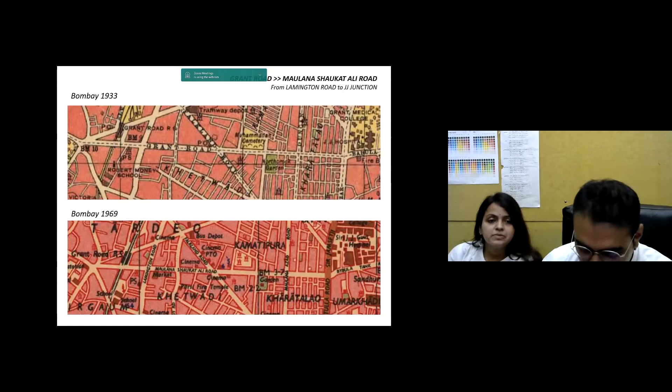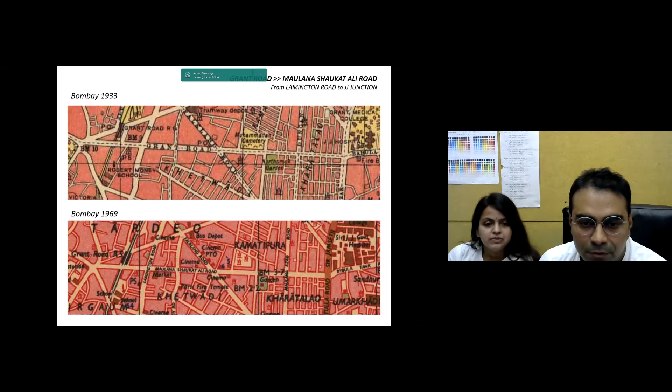This project is located on one of the old arterial roads called Grant Road. It was formed during the 1900s, during the plague epidemic, as part of city planning, when large thoroughfares were created to form the east-west artery of the city. It cuts across very important old precincts of Bombay, including the bazaars and railway stations. It also has an old entertainment district, the Kamatipura area and Falkland Road, the red light district.

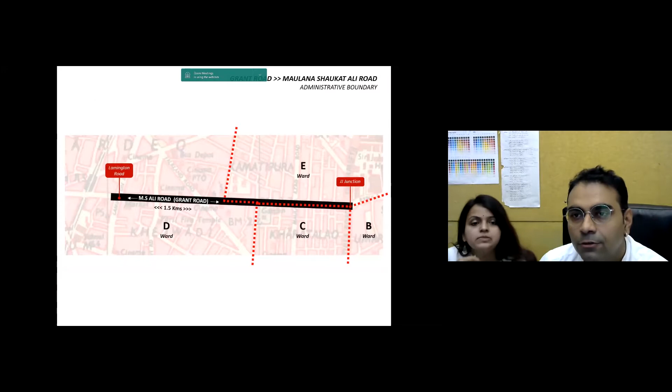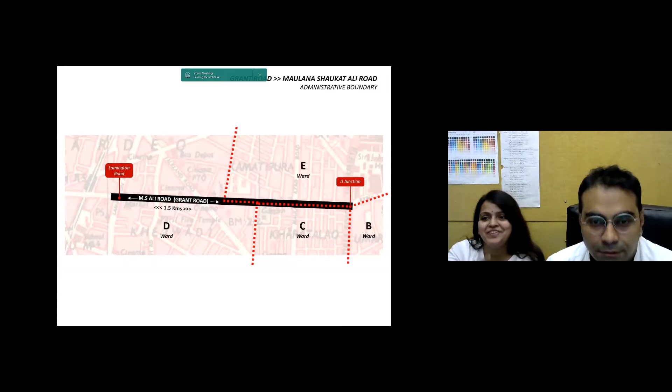The stretch we are looking at starts from Lamington Road Junction near Grant Road Station towards Mohammad Ali Road, JJ Junction. It stretches 1.5 kilometers, and its administrative boundary is shared between four wards. So when dealing with administration, you're dealing with four wards and people from four wards. The road itself has a division where half comes under E ward and half under C ward.

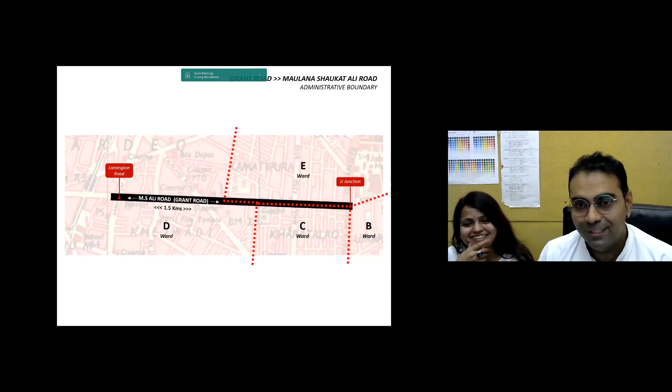When we started working on this project, we realized there are too many stakeholders of the street. On one hand you have departments like road cutting lines, RL remarks, city survey department—even to move a light pole, there's an electric work department, garden department, etc. And then there are stakeholders of the street itself: residents, vendors, hawkers, street animals, pets, etc.

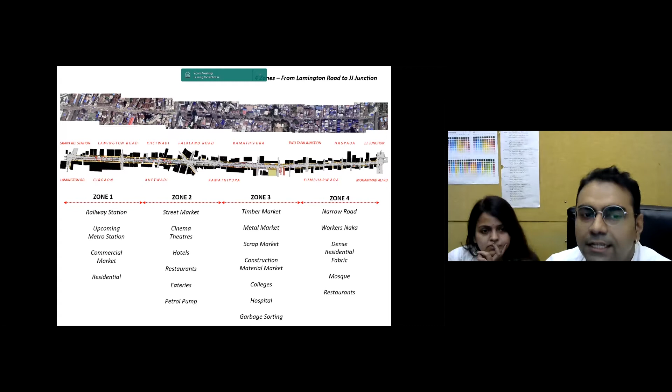So primarily, we looked into the zones. There are four major zones of the street. Zone one, near the station, is the market and railway station, which also has an upcoming metro station. Zone two looks into cinema theaters, hotels, restaurants. Zone three is the bazaar, with the timber market, metal market, scrap market, and old Chor Bazaar around it. The fourth zone is majorly a workers' naka, where every early morning workers set up at the corner and contractors come to take them for work.

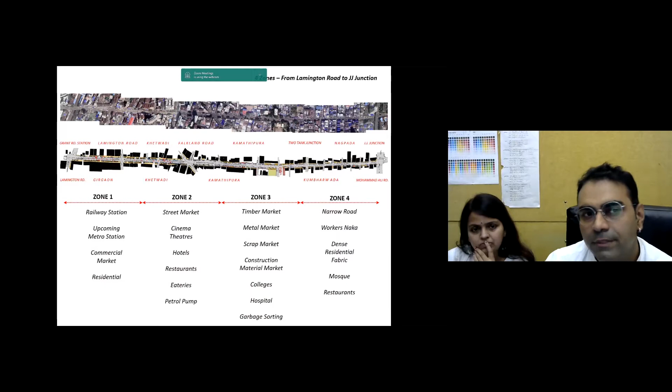The road has a right of way of 36 meters wide, and it shrinks down to almost 16 meters on the other end—so it becomes 50% at that stretch.

What we realized is that it's important to record the complexity of the site. So the first step was a rigorous recording of the street, to understand the patterns of the street. We started drawing them because the survey drawing really ignores a lot of aspects of the street.

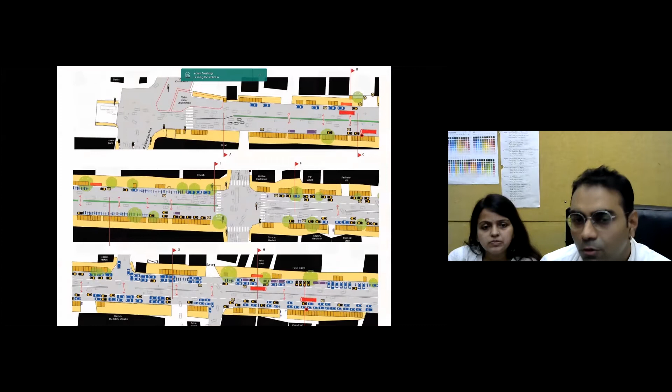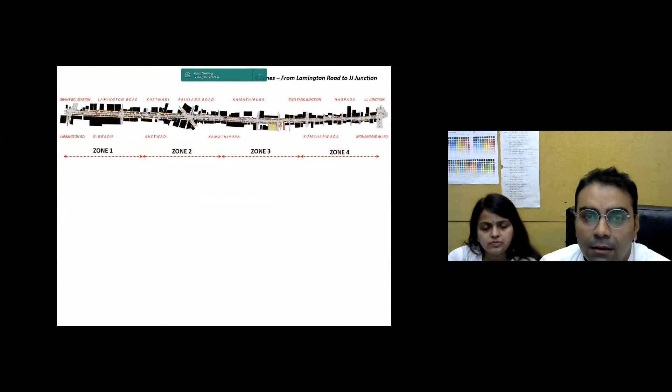Second, we started conceptually looking at how to strategize it. We had four large ideas for a residential fabric, for the market fabric, etc. But then we realized that this is a kind of street which will need a customized solution. It can't be seen as these generic typical ideas which can be stretched across the edge.

So we actually drew the entire project—we'll come on to that in the ending slides—going with the individual ideas we addressed, and eventually we had to draw the entire road. You can't draw a typical section and multiply it anywhere; you have to actually go about drawing each and every corner of the road.

So the first thing was looking at the idea of threshold, because the way Indian streets or any of the roads are designed, they always take you from point A to B, but the entire transition on the interface in between is what actually gives character to Indian streets. So how do we really work with that?

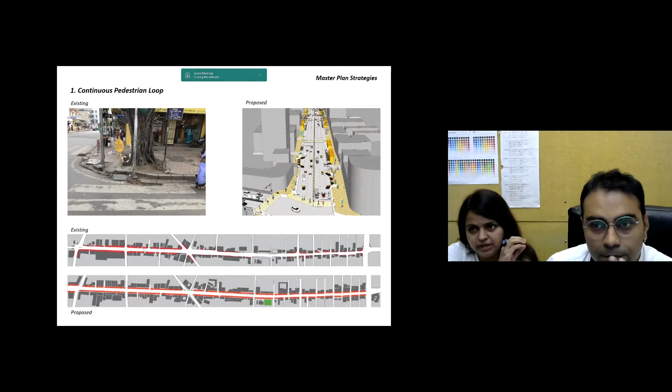Actually, continuously, there's not even space to walk. So if you start from one point of the road, you won't even reach the last point. So first is giving space where people can walk continuously on the street.

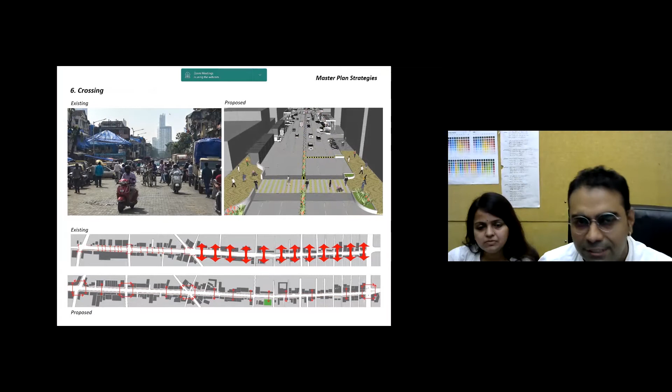Second was to work around crossings, because in India people wave their hand and everybody crosses—it's never a method. There were almost 52 points where people were crossing all across. So we strategized how people cross, and how handicapped people get access through these roads.

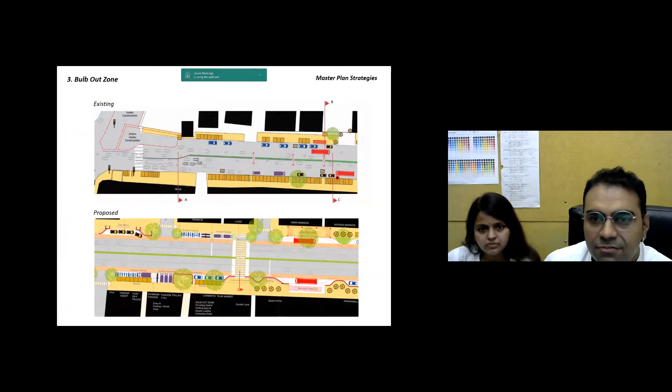We also looked into the idea of creating a bulb-out zone, like an edge which was the threshold of the buildings and the streets, which accommodated goods vehicle parking, scooters, hawkers' area, and a lot of other facilities that existed on the road. Another interesting specific edge was this large stretch which was like a sponge—the real threshold of the city, which is no one's and everyone's at the same time.

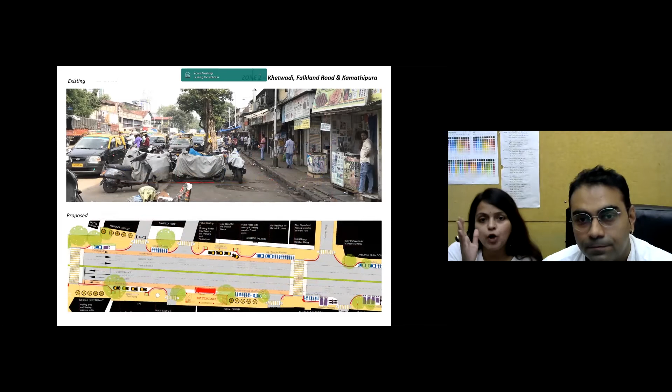All kinds of activities take place there. Currently this threshold never gets designed, and that's where a lot of activities find their place—not only parking, but hawkers, people sitting, people sleeping. Goods loading and unloading of the markets, people waiting for the bus—all that activity happens within the threshold.

So I think our main focus was to design that. That was one of the stretches which we really took as a design component, which did not disturb the road nor the pavement, but just allowed these everyday practices to find their space within them.

Then we looked into the idea of sculpting the domains, because there were lots of stakeholders and a lot of domains. Most of the shops had their pets and they were bathing them.

So there was a junction where we created an animals' plaza where local pets could be bathed and fed, with drinking water facilities. There were hawkers along the entire stretch, and there were organized vendors along the stretch as well.

So we designed the street vending zone as a kind of prefab structure which could organize activities on the pavement. We actually went and counted all the shops, recorded their sizes and the professions they were doing, and accommodated them where they were located, but amalgamating them in one place.

So they have a good opportunity for business—there are more than 300 vendors on the street across the stretch.

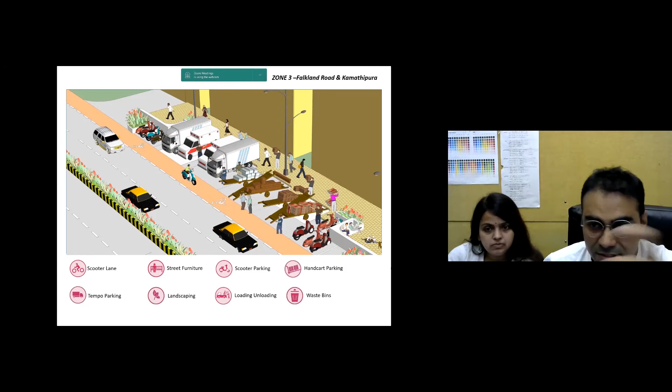There were loading and unloading zones created for the haath gadis and the local bazaars, and for the tempos, etc. There were kabutar khanas and a lot of these kinds of activities. This is the space which was the workers' stall, and there's a newspaper reading stand on the left.

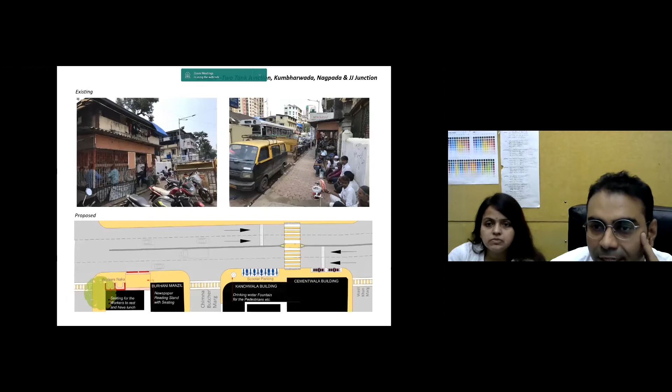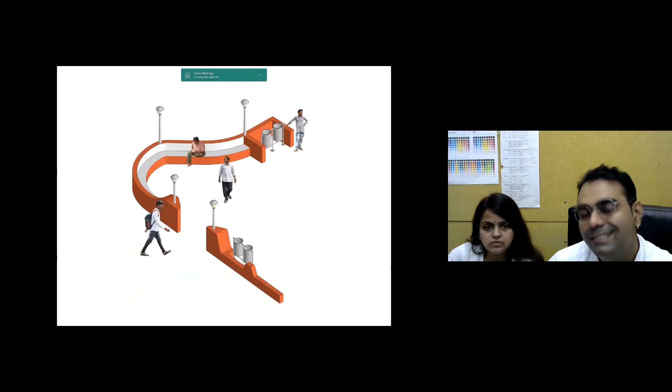Eventually, along the entire stretch, we worked out somewhere around 450 to 500 pockets where all this street furniture, activities, facilities, and utilities can be incorporated, including dustbins, street lamps, loading areas, and crossing points.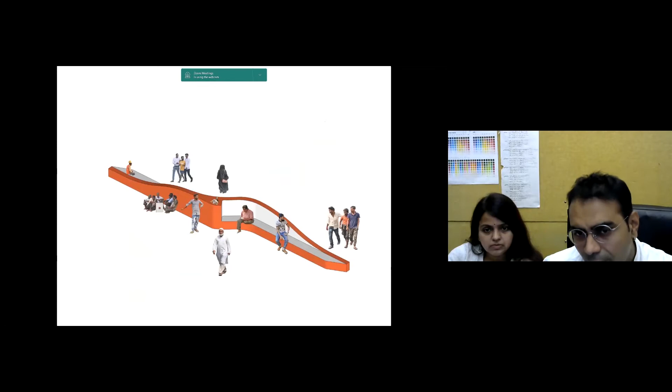This is one of our main ideas through which we have added the interface of the design, the interface of the threshold through these objects. Due to time constraints, we're not able to put all of them, but there are somewhere around 400 to 500 of these.

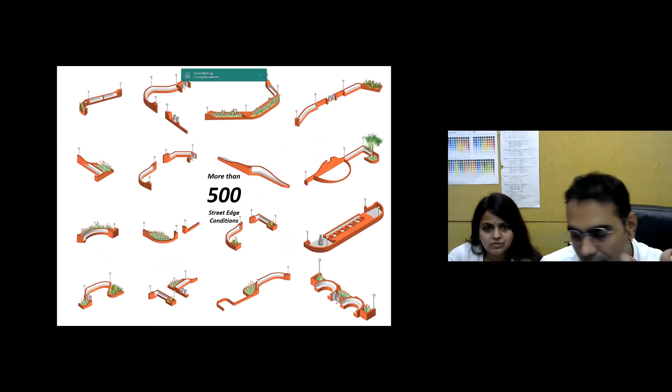When designing the street, it's also about scripting the urban form, because roads are generally seen as just the paved area for vehicles, but what kind of city are we trying to shape?

There were a lot of junctions where we defined and realigned how crossings happen, where people can pause, find a place to rest, and have lunch in the afternoon.

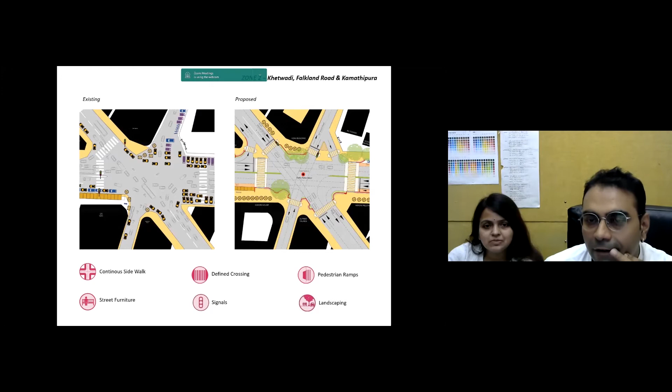There were a lot of structures that are usually separate, like toilets, bus stops, and light lamps, which currently obstruct the way when you're walking. So we proposed the idea of hybrid amenities, amalgamating them together so they don't come as an obstruction on your path.

Many of these places also don't get used because of the way they are placed.

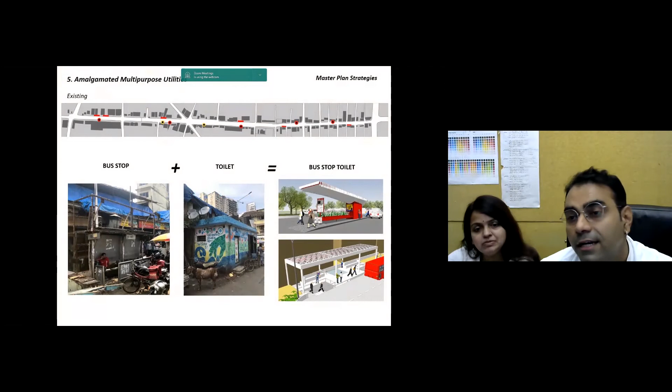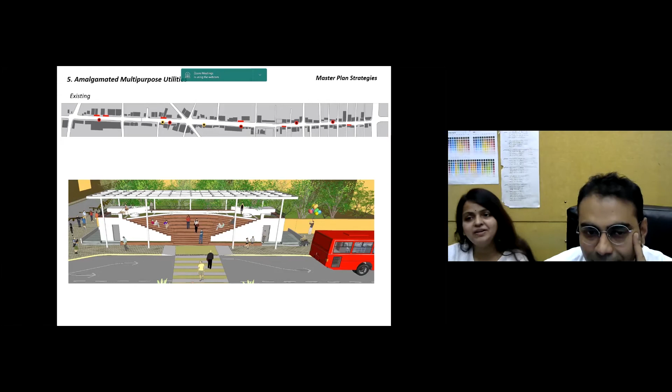So we created a bus stop toilet, a pavement toilet, and a space for the workers' naka where they could halt and find space. It's a negotiation with a toilet underneath, a bus stop, and a space for workers to rest — all three amalgamated in one.

There were bus stops with toilet facilities, designed for very small sites. Some were underground toilets combined with bus stops — the right of way for pedestrians continues, while the toilets are placed underground, which also works as a bus stop at an upper level.

Then we looked into the idea of how we are shaping the city. An exercise was conducted to draw each of the buildings along the stretch. There are more than 400 buildings along it, for which we created a long scroll, 30 feet long.

Many of these buildings are getting redeveloped and erased, but they were actually the buildings that gave identity and language to this Maulana Shaukat Ali Road. This is also a junction where the metro station and railway station will come in the future.

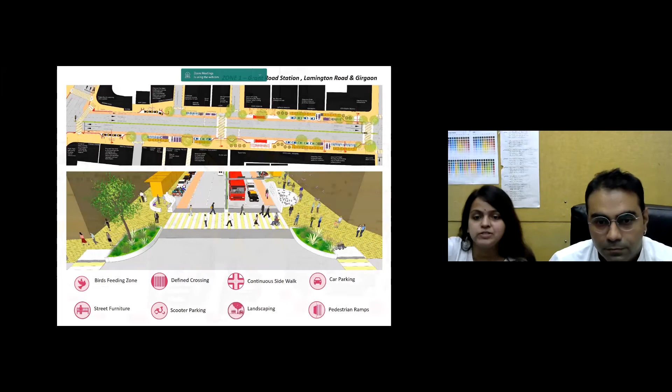There will be a large volume of people coming out of the commuting station, so the idea was to widen these crossing points and junctions where people are constantly crossing, so they can accommodate a high volume of people.

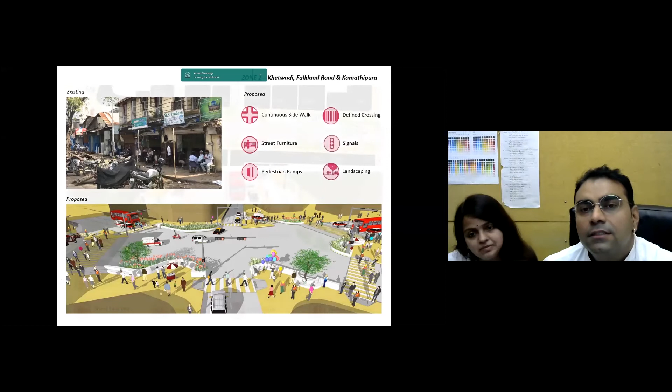These were some of the crossings and traffic junctions, and this is just a glimpse of that long 30-foot scroll, where notes were made around each building depending on what activities take place and what gets used.

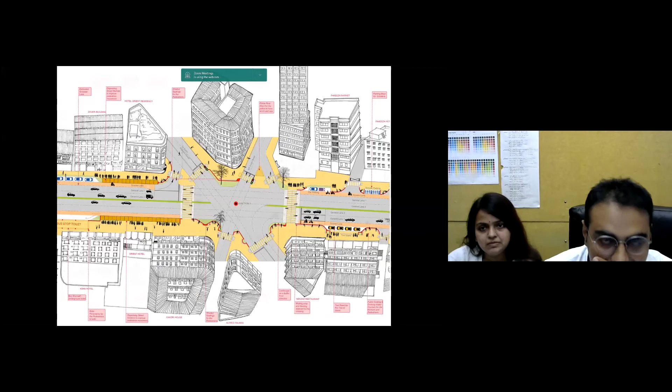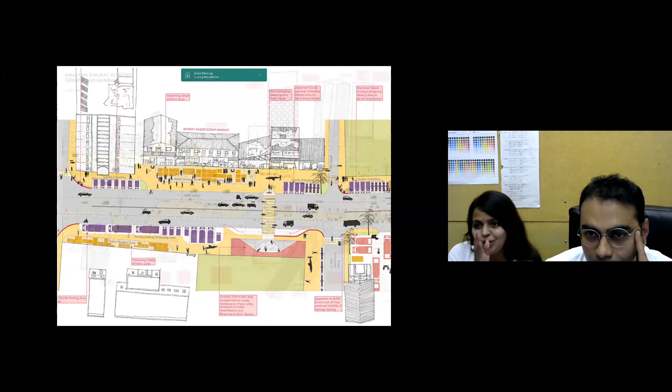These small notes helped carefully script and draw the entire stretch. We had to figure out a new method to record and draw the entire road, because cross sections or typical master plans weren't doing justice to the complexity of the site.

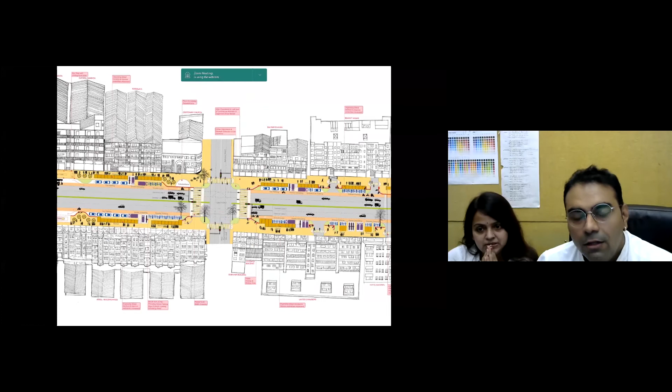This is actually a drawing we developed over a long time to record all the activities. It was also nice that when we presented it to the municipal corporation, they were able to associate with the buildings and start looking at the city differently.

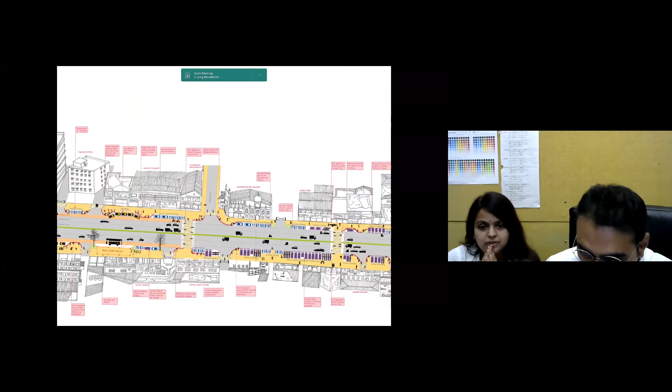Otherwise, many of these projects are just given through tenders to contractors, who pave the roads and the project ends. But people on the site also understood their road much better through the drawing — they were able to connect with it.

They could say, okay, near the mosque this is happening, near this junction this is happening. So it's a good way to even explain to people what is going to happen on the road.

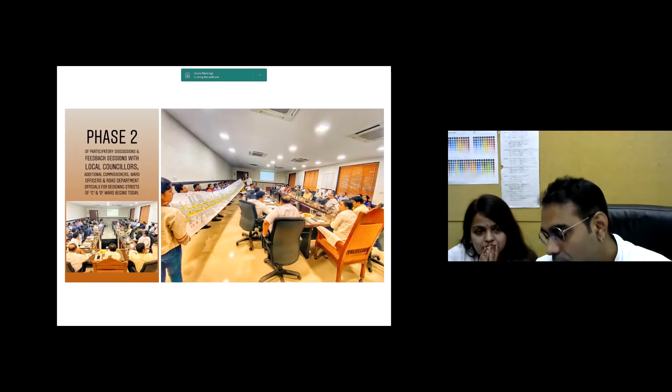Then there were different stages where it was presented to the commissioners of different wards, the local MLAs, the local political representatives, the councillors, and also all the departments - roads department, hydraulic department, traffic department, sewerage department. There was a meeting held with all the departments to synchronize what is to happen.

What you see on the left is that scroll which was always discussed with them, and then they shared their notes and ideas behind this, and the process was further defined. That's the traffic commissioner on the left, the municipal commissioner.

We also did an experiment. The scroll of the street was kept actually in the public plaza at VT station, and a lot of people started sharing their views and ideas around these things.

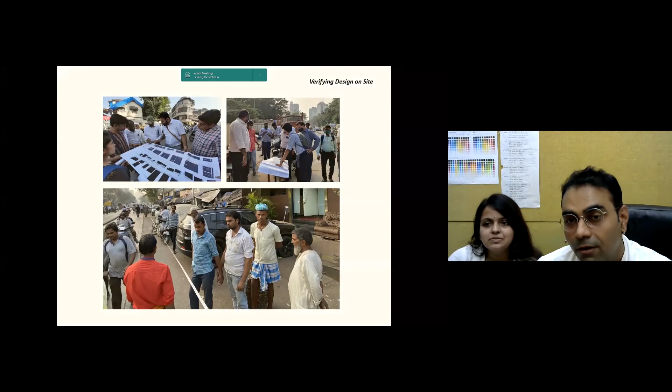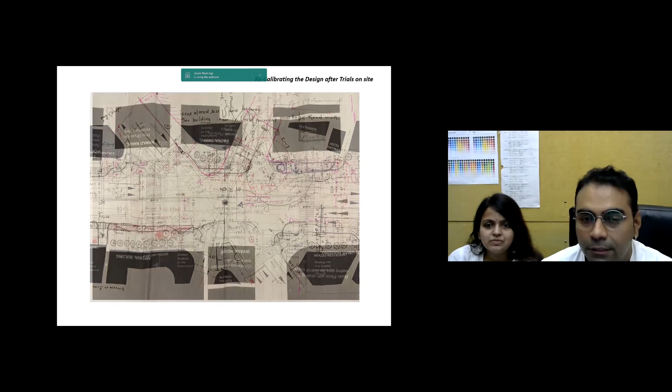This was at the municipal commissioner's office at Mumbai, and eventually it went for mock testing on the field, where what was designed on the screen was then tested on site, marked onto it, and recalibrated. There were lots of things which people suggested and the shopkeepers wanted, so this went to a third, fourth round of negotiation and editing, looking at the reality.

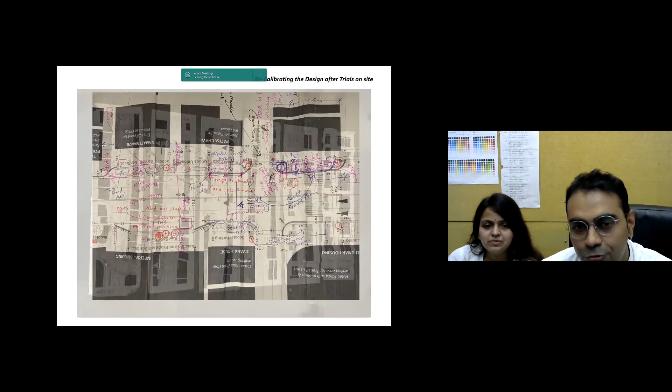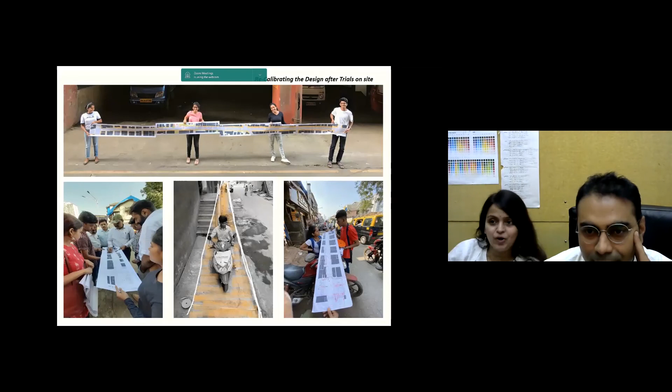These are some of the field notes which we collected over a one week period. Our entire studio was on field during that time. There were also scooter lanes suggested, so we marked those on. There are a lot of two-wheelers on site currently, and they are constantly colliding with the four-wheelers. The idea was to give them their own lane where they're able to safely travel through the road.

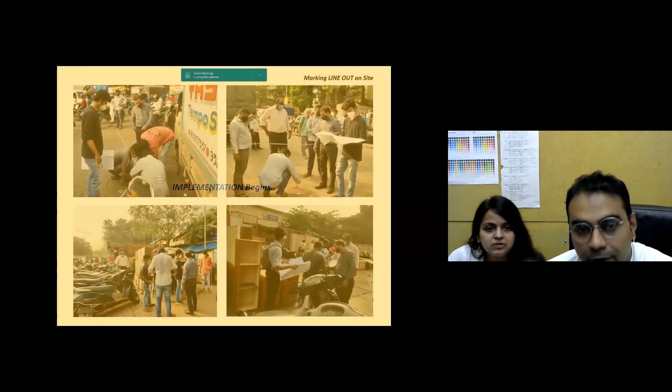Right now they started with the implementation process, so we were having a line out. These are some of the technical drawings which we have started with, and it's ongoing.

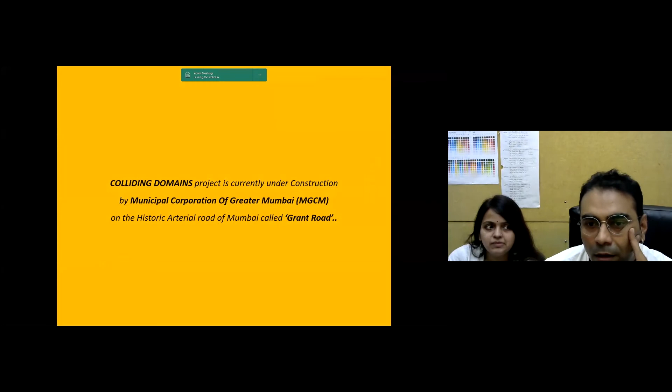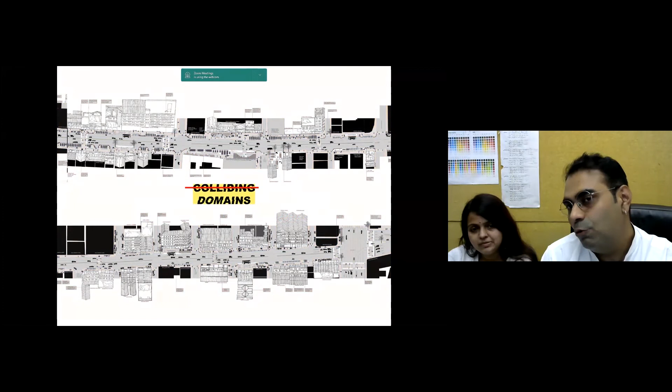Right now we are engaged with four wards of the city for a stretch of 1.5 kilometers, and it has been taken as a pilot project by the MCGM. Eventually the idea was that these domains of the city which are colliding, you figure out a strategy where we can make peace with all these stakeholders and create a more lively environment - look at it more as a celebration of the everyday. Yeah, that's it.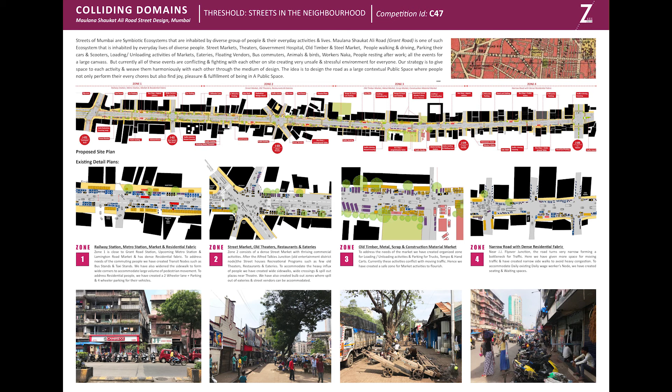I'd like to talk about the jury award winning project by Kalpit Ashar and Mayuri Sisodia. I think this was a very intrepid attempt to reclaim the sidewalks along Shaukat Ali Road as a crucial public and community space, especially for the dense and congested neighborhoods that flank its entire length. This remains a highly contested site, and these pavements have shrunk over time with informal occupations and encroachments of street commerce, private interests, and poorly managed commons, all vying for space along this primary artery that runs north-south through the city of Bombay.

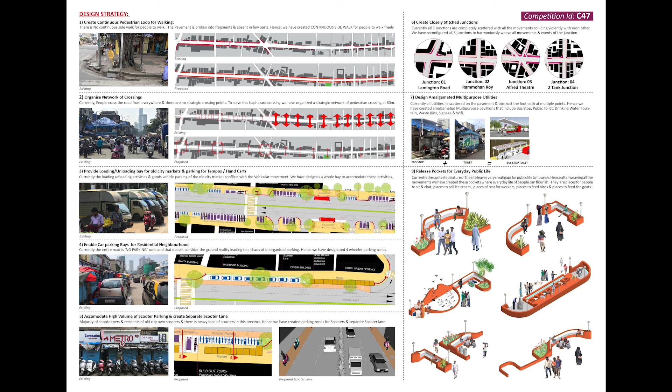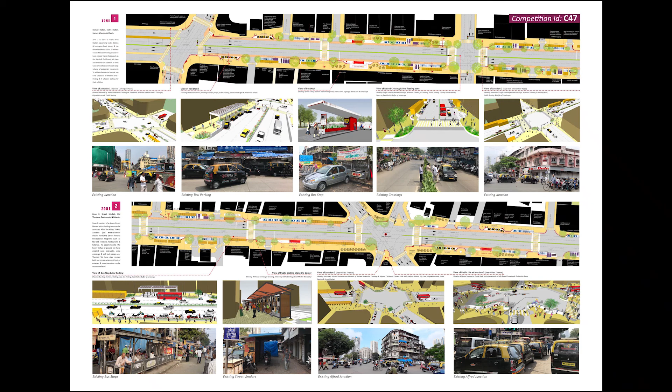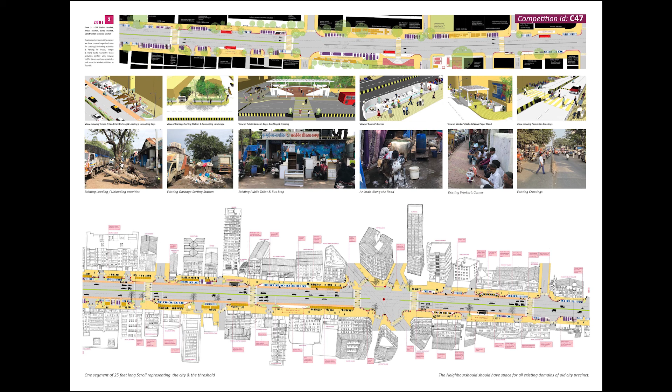What was interesting about the project was that, through a very challenging participatory process, which was informed by strong research and in-situ site mappings, which I was actually very impressed with, the proposal presents strong and viable ideas for rewidening these sidewalks, infusing creative imagination of a public life that can once again enrich the lives of these people who live and work in these dense settlements.

We love the project Colliding Domains. It was compelling in the way the team studied and tried to organize every corner, every person, every activity, every speed, as if they were really working for each of the social actors in this symbiotic ecosystem, as they call it, fully negotiating to equally share this Grant Road.

The aspect of this proposal that I appreciate the most is that the architect is working with the city administration to resolve the multitude of negotiations and conflicts and contestations that happen at ground level in all cities. And resolving these is only possible through the act of design, the intervention of somebody who understands how materials, spaces, and people come together. This is something city administrations don't understand and something that architects understand very well.